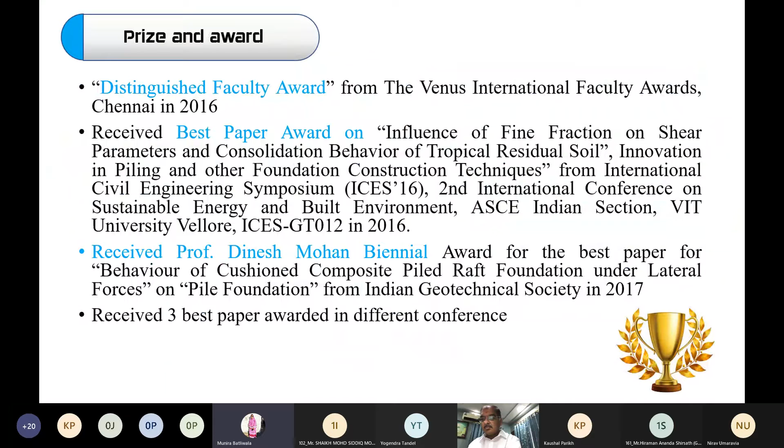Sir has published more than 180 research papers in reputed international and national journals and conferences. Sir has received the Shri M.S. Jain Biennial Award for Best Paper in IGC 2013, Professor Dinesh Mohan Award in IGC 2017, and the Distinguished Faculty Award for the Venus International Faculty Awards 2016. Sir has also received many Best Paper awards in many conferences. Professor Solanki sir has organized more than 20 national level events including STTPs, FDPs, conferences and seminars. He was the chairman of the Indian Geotechnical Conference 2019 Surat. Sir has been elected as member of Executive Committee IGS for 3 terms. Sir worked as the Dean and Head of the Department at SVNIT Surat. Sir has published 9 books and edited proceedings. He has 30 years of teaching experience for undergraduate and postgraduate students.

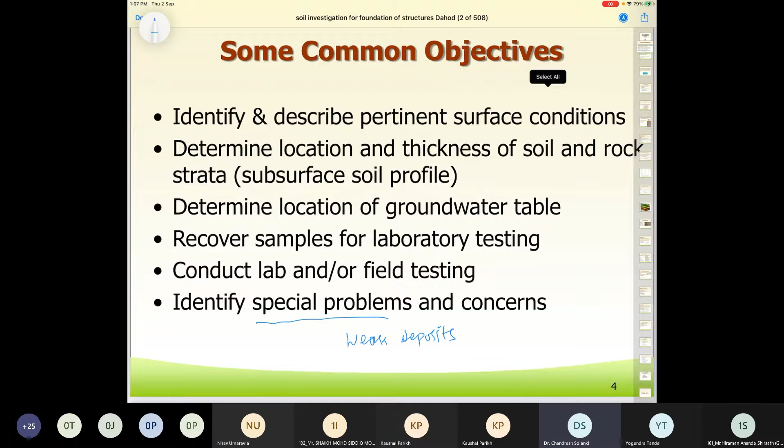Many of you may have come across this point while designing foundations. If you are getting your foundations on weak deposits, you need to apply some ground improvement techniques. I have seen the schedule that some speakers might have discussed ground improvement techniques - what are the different techniques and in which situations these techniques are to be applied.

Geotechnical investigation would consist of what? It consists of the number of test bores, the depth of the test bores, what field tests are to be carried out at the site depending on site situations, the laboratory tests to be conducted, and correlations of the field and laboratory test data for determination of the safe bearing capacity.

Here I would like to ask one of these questions to the participants. Can you elaborate on what are the correlations between field and laboratory test and how geotechnical engineers decide the same? My question to you is how will you correlate the field and laboratory testing as far as soil investigation is concerned.

Please, one of the participants may answer if possible. Participants can write in the chat box, they can interact, otherwise they can mute themselves. Okay, if participants are mute, I may not ask Dr. Yogendra. It's okay. Yes, okay, because I may not be able to see the chat box since I'm working from iPad, so it may be difficult to go back. Okay, no problem.

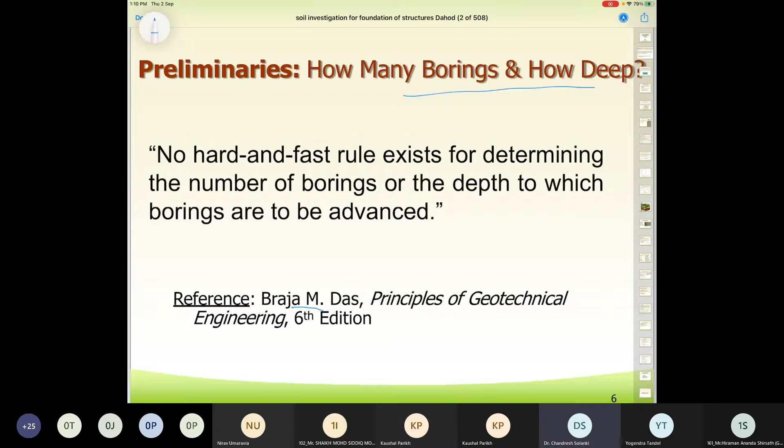However, in the book by Braja M. Das, it has been written that no hard and fast rule exists for determining the number of borings or the depth to which borings are to be advanced. However, we need some guidelines - our IS codes as well as general guidelines - for deciding the number of borings and depth of the borings.

Preliminarily, how will you decide the number of borings? Conventional wisdom says the number of borings will increase if soil variability increases. If load increases for more critical and significant structures, the number of borings is more - so the number of bores will be more in such situations.

The thumb rule says that in case of soft soil, generally the spacing between two bores is kept at 100 to 200 feet, whereas in case of harder strata, it may be kept up to 500 feet. This means your boring spacing is in the range of 30 to 60 meters for soft soil, whereas it may go up to 150 meters for hard or dense strata, or good strata.

How many borings will have to go for and for what type of structures? You may have to deal with various structures, or if you are a faculty member at an institute, you may have some knowledge of geotechnical investigations. Some of you might be teaching these subjects too. In such cases, some guidelines should be with you in terms of the number of borings.

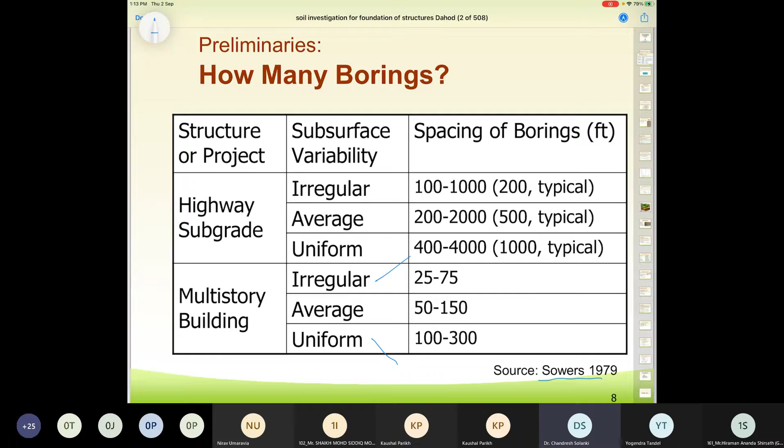This is about test bores. How will you decide the number of test bores and what you'll have to do? As per IS 1892, clause 2.3.1, for a compact building site covering an area of 4000 meters square, one borehole or trial pit in each corner and one in the center should be adequate. For smaller and less important buildings, even one borehole or trial pit in the center will suffice.

You see that this is a square plot area, whereas in this case, this one is the rectangular plot area. In case of the square plot area and rectangular plot area, whenever you have a plan area of around 4000 meters square, if your building is ordinary or very less important, in such cases, one borehole is sufficient.

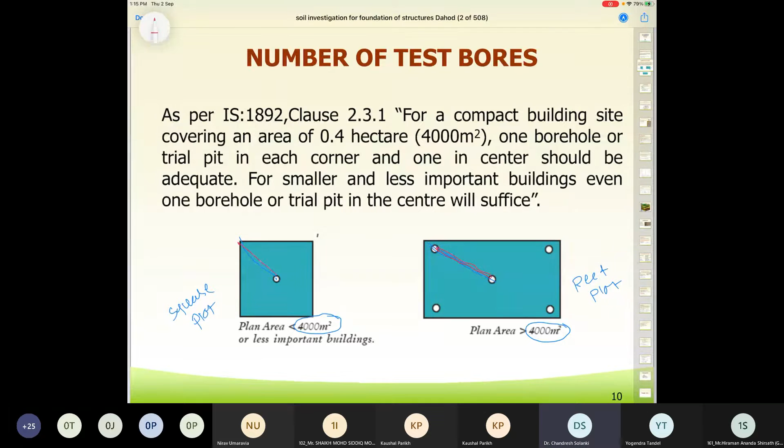But here it has been shown that this is a square plot area. Its corners are closer to the center, hence the number of boreholes required are less. Whereas in case of the rectangular plot area, the corners are away from the center, and hence the number of boreholes required are more. So you can find that this distance is more, you can find here that the distance is more. Hence, we'll have to go for more boring. Whereas this distance takes care of the plot area, and hence fewer boreholes may be sufficient.

However, whenever the soil is heterogeneous, where the soil is not homogeneous, in such cases, instead of one borehole which has to go for the square plot area, you may have to go for 3 boreholes instead of one. This has to be increased to 3 boreholes because the soil is heterogeneous. Whereas in case of the rectangular borings, you may have to go for 5 bores, even if your plot area is around 3000 meters square.

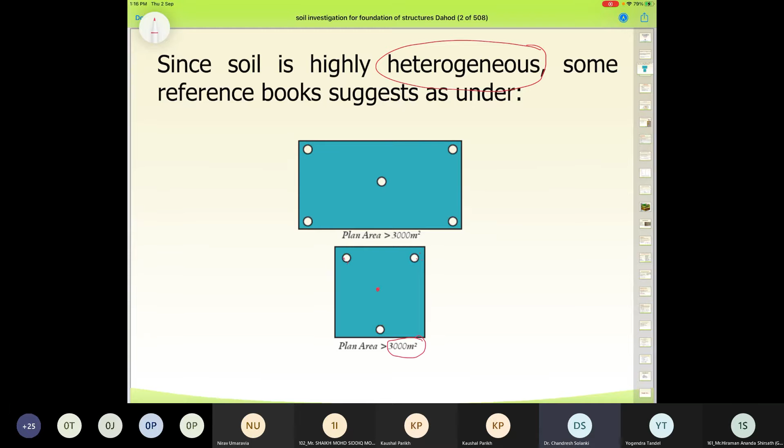However, for ordinary buildings, investigations can be limited to economize in money and time, and 2 test bores may be taken across the site. If highly variable strata are encountered, additional test bores may be taken. So you see that this building is an ordinary one. Investigations can be limited to economize in terms of money and time. In such cases, instead of 5 boreholes, here you have to go for 1 or 2 boreholes. But such risk you may take into the conditions whenever you have such situations.

Now, what to do when the area to be investigated is large and the plant layout is not finalized? The area may be divided into a grid of suitable size and test points taken on grid corners. You see this is the plot area, a larger area, which has been divided into different grids. We are finding out the number of grids.

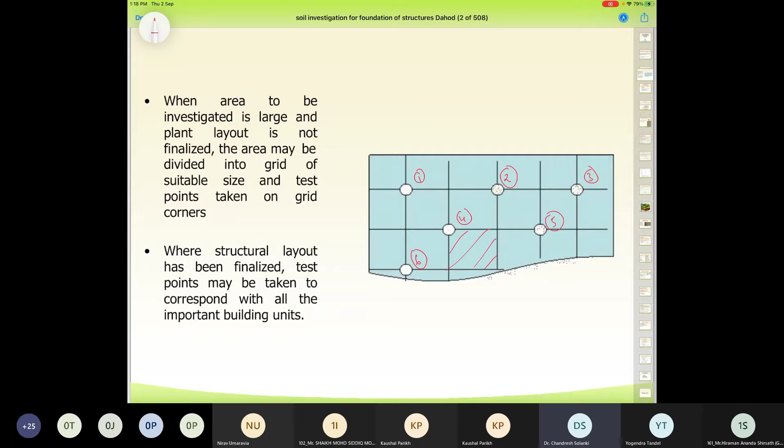The test points are being marked here. In view of the structural layout being finalized, these test points might be marked wherever the column is heavily loaded, wherever the staircase has to come, or wherever heavy machinery has to come. Certain points are marked for the bore logs for this plot area, and you have to decide the number of boreholes accordingly. So this area has to be divided into grids, mark the important points, find its locations, and go for borings at that particular point.

Dr. Yogendra? Yes, sir, may I go ahead? Yeah, okay, everything is fine, in terms of voice, slides, presentations, everything. Can you see the things I write with the pen? Yes, it is visible. Fine, okay.

For various structures, the number of test points may be considered as follows, in respect of the type of structure and number of test bores. Lightweight utility structures like parking sheds and watchman cabins, where structures are not so important, you may go for a minimum of one test bore, or sometimes a trial pit is sufficient. You may not have to go for entire boring; even a trial pit lets you decide the depth of the foundation.

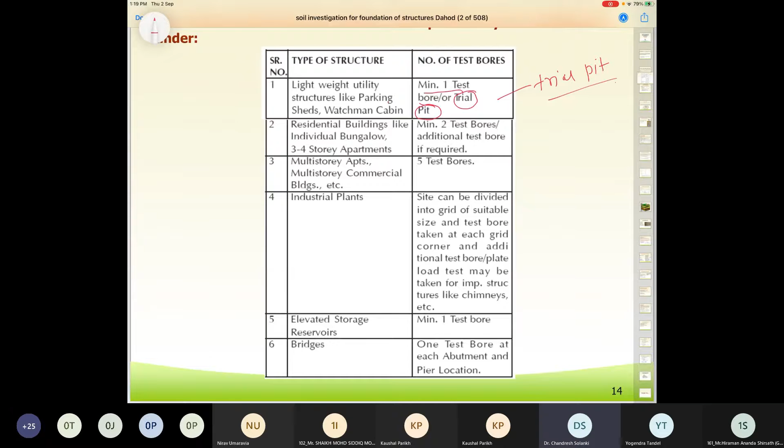Whereas guidelines show that for multi-story apartment or commercial buildings, you must go for at least 5 test bores of appropriate depth, in view of the multi-story structure. In case of bridges, you must go for at least one test bore at each abutment and each pier location. These are some guidelines for different structures and how many test bores you need for a particular site, as mentioned here.

We have discussed how to decide the number of boreholes. Now we come to the depth of the test bore. The depth of the test bore should extend up to a point at which the vertical stress due to the proposed structure is equal to or less than 10% of the original effective stress at that point before the structure is constructed. You might have studied about the pressure bulb and isobars, which are useful in computing foundation settlements.

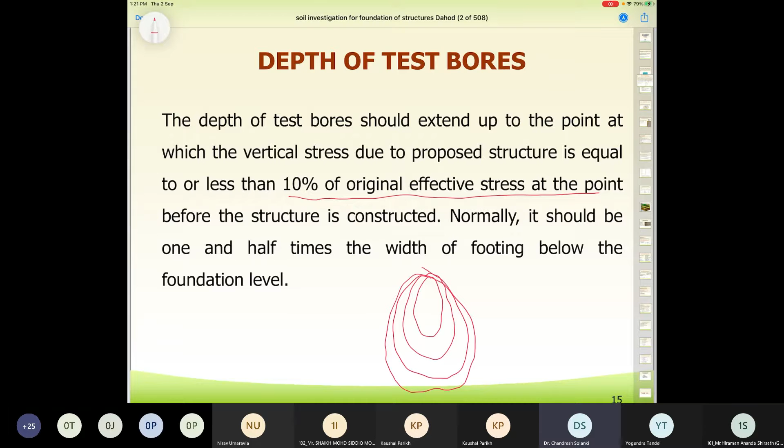Normally it should be 1.5 times the width of the footing. So you are required to go up to 1.5 to 2 times the width of the footing below the depth of the foundation, particularly in favorable conditions. In unfavorable conditions, you may have to go deeper than 1.5 to 2 times the width of the foundation.

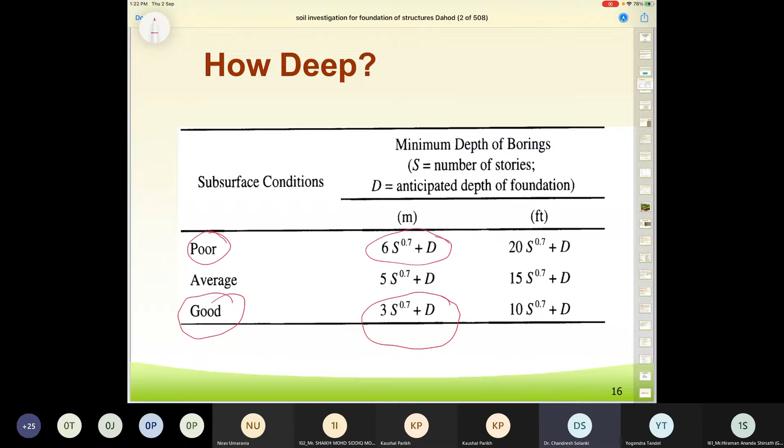Some guidelines are given in the literature on how to decide the depth of borings for different numbers of stories and anticipated depth of foundation. It also depends on the type of soil. For good soil, you may go less deep, meaning the depth of exploration is less; for poor soil, the depth of exploration is more. S indicates the number of stories and D indicates the anticipated depth of foundation. For a 15-story structure with an anticipated foundation depth of 3.5 meters, depending on soil type, you can decide how deep to go for your explorations.

Preliminarily, how deep will you go for bridges? Boring depth is governed by various factors including foundation type, foundation loads, scouring depth, etc. Generally speaking, 50 feet to 80 feet is reasonable. However, practical experience is useful. A geotechnical consultant familiar with a particular site may take some risk and go for lesser depth, whereas one unfamiliar with the site may have to go deeper for the first bore and then adjust.

In addition, you need to see the nearby structures, when they were constructed, and their existing condition. Based on that, you can have some guidelines for deciding the depth of exploration.

Preliminary, we have seen how many borings and how deep you will go for. Final engineering can be no better than the data upon which it is based. It does indicate that you should have your own data, your own geotechnical report, your own soil investigation report.

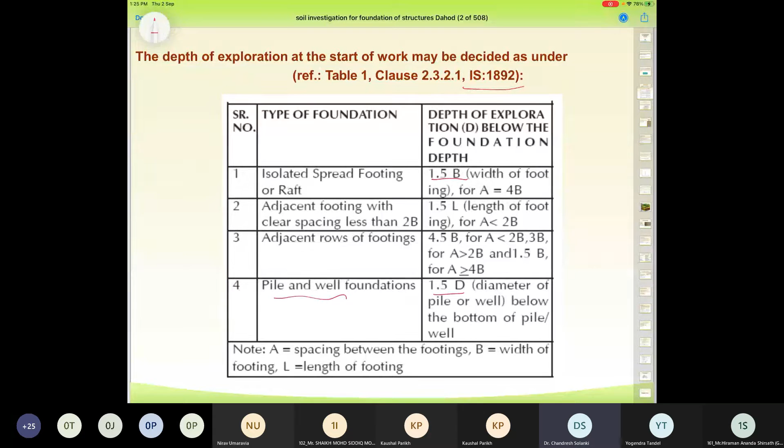How will you decide the depth of exploration? This we have discussed. What is geotechnical investigation? What are its objectives? What is the sequence of geotechnical investigation? How will you decide the depth of exploration? How will you decide the number of borings? Some of these guidelines have been discussed by me here in this lecture.

Now I'm going to the field tests. What are the field tests to be performed in the soil, and what results are obtained from that? And how the results obtained from the field test are to be interpreted for your design, this has to be discussed by me.

Yogendra, is the slide clearly visible to you? Yes sir, it's visible. Okay, fine.

The most widely used method of subsurface investigation is boring holes in the ground and simultaneously conducting the standard penetration test and collecting undisturbed samples. You may already know about the collection of undisturbed samples as well as collection of disturbed samples, and you may have come across the standard penetration test many times. Today I am going to discuss in detail the interpretation of the standard penetration test, and how the field N value obtained has to be interpreted for foundation design.

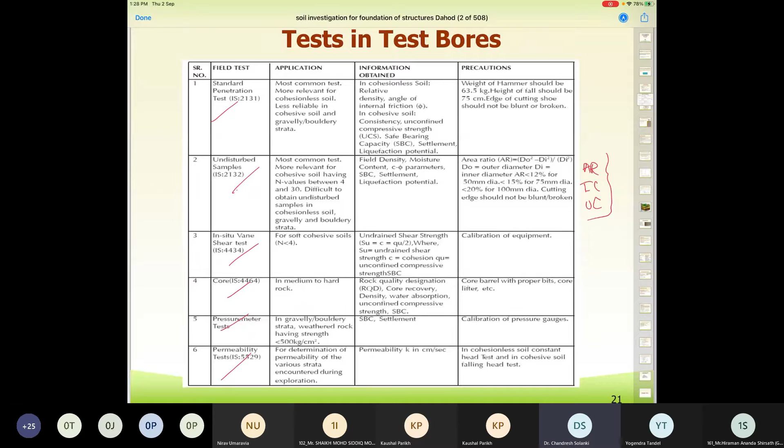Now, what are the tests to be performed in trial pits? You can also collect undisturbed samples from trial pits. You can perform the plate load test on trial pits. Some of you might not be aware of IS 5249. I request you to refer to IS 5249.

I request you to refer IS 5249, which is a code for determining the dynamic properties of soil. This code describes the block vibration test and cyclic plate load test for determining the value of the coefficient of elastic uniform compression, CU, which is useful for machine foundation design. This value can be obtained either by the block vibration test or by performing the cyclic plate load test, as described in IS 5249.

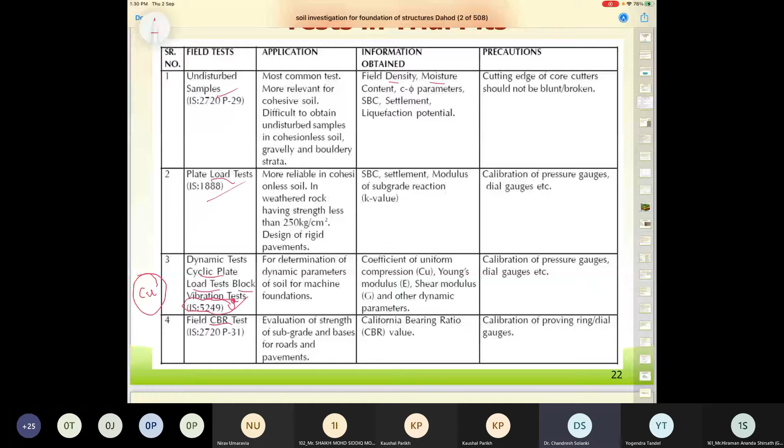You are familiar with the California Bearing Ratio test, plate load test, and undisturbed sampling, etc. The results obtained from these tests are used for design purposes. What information is obtained from a particular test, and which tests can be performed on trial pits, has been mentioned in this slide.

You may be familiar with these three types of tests. You have the Standard Penetration Test, which we are going to discuss in detail in this class. Cone Penetration Test - you have two cone penetration tests: DCPT, which indicates the Dynamic Cone Penetration Test, and SCPT, which indicates the Static Cone Penetration Test. The Static Cone Penetration Test is particularly useful in deep foundations.

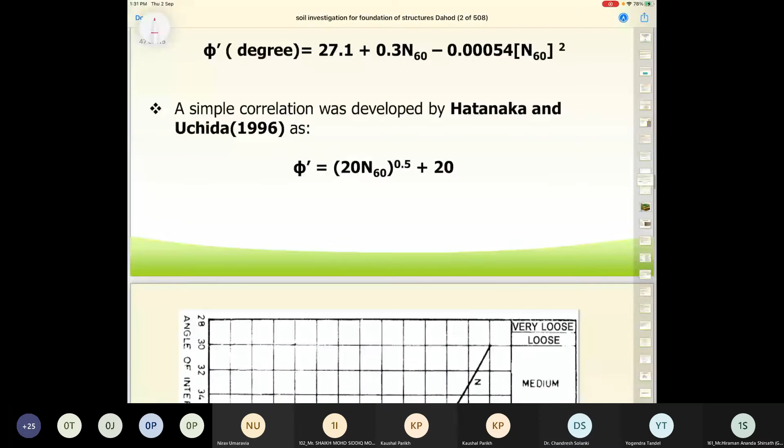Whenever you are going for pile foundations, this test is useful. The Vane Shear test is particularly useful in sensitive soils, marine soil, or soft clay. This test is used for performing at the site to get the soil properties.

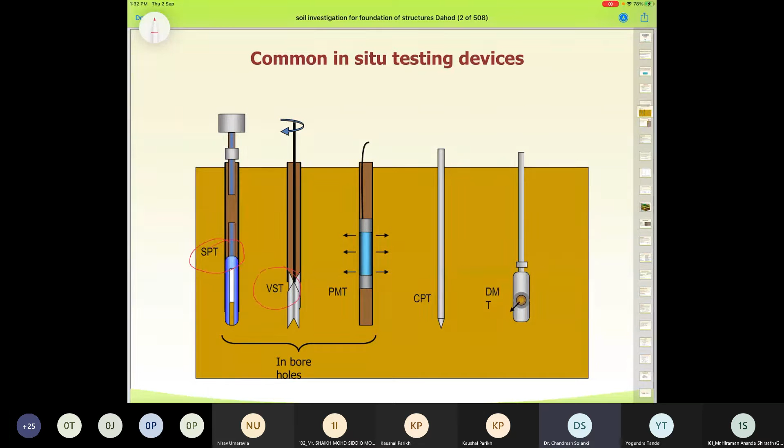Common in situ testing devices: Standard Penetration Test, Vane Shear test, Pressuremeter test, CPT test, and Dilatometer test. These are the tests which can be performed.

Now, what is the Standard Penetration Test and what do we do in that? How can the results of the Standard Penetration Test be interpreted - that we are going to see here. The Standard Penetration Test is an in situ penetrometer test carried out in a borehole, so the test is conducted in the borehole. This test measures the resistance of the soil against penetration. You are driving the sampler into the soil, into the borehole, to measure the number of blows required for the particular thickness of the stratum.

It is commonly used for testing sands and gravels. This test is mostly preferable in non-cohesive soils. However, in case of non-cohesive soil, this is more preferable. Some interpretations have also been obtained by various researchers for cohesive soils with the N value. An empirical correlation is derived between the soil properties and the penetration resistance N value.

This is showing the mind map of the SPT test. This mind map, whatever has been shown here, may be useful to you in many ways. I am going to show one sentence in this presentation: in conventional foundation design, 85 to 90% of the design is based on SPT test data. SPT test gives you the N value, and this N value is correlated with many soil properties.

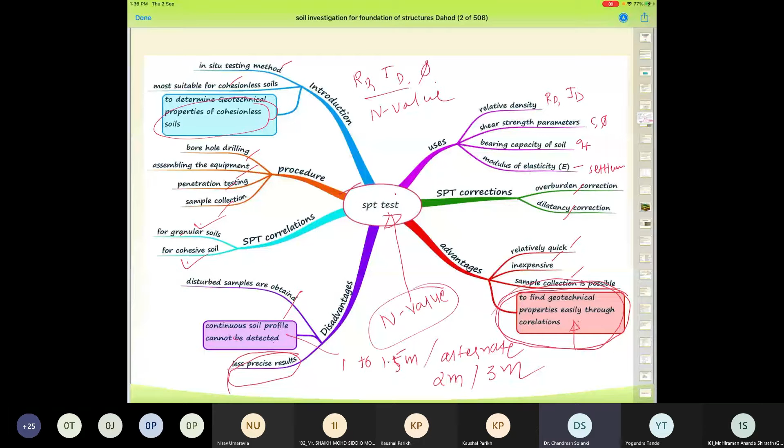So this is the entire thing being shown for the SPT test, and you can understand a lot of things from this mind map which has been shown to you.

Dr. Yogendra or Nirav? Yes, sir. May I go ahead? Yes, okay sir. Will every participant be comfortable with this? Yes, sir, it's comfortable. Just confirming, as this is online I do not have reactions from the participants, that's why I am confirming with you. Thank you, Dr. Yogendra. Doesn't matter, sir.

Standard penetration test is conducted using a 65 kg hammer, sometimes its weight is written as 63.5 kg. Height of the fall is generally considered to be 75 centimeters, and this is the rod through which we apply to drive the sampler.

This is the split spoon sampler in which the soil is collected. We drive it for three slots of 15 centimeters each, but the first slot is considered an initial seating drive, and whatever number of blows required for the next 300 mm, the summation of these two is known as the capital N value or blow count.

This is known as the N value. In standard penetration test, we use a hammer of this weight, with height of fall around 75 centimeters.

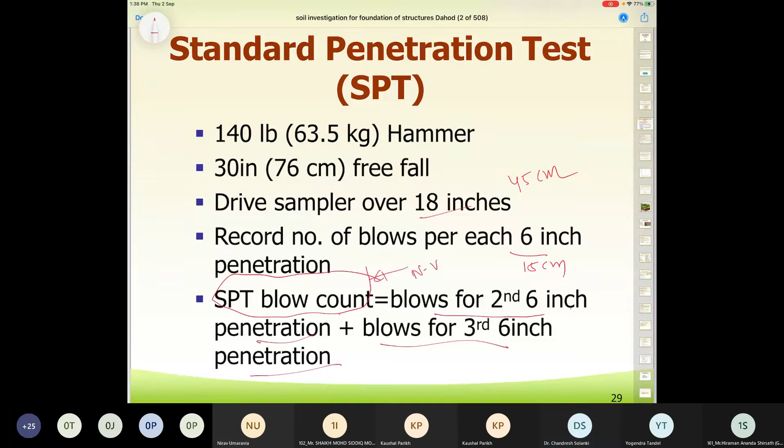Standard penetration test is mainly for granular soils, may not be reliable in clays, but sometimes we have to use the data anyway. N value is correlated with the phi value and E value. Phi value indicates the bearing capacity, and E value indicates settlement studies.

This is done with boreholes at 1.5 meter depth intervals. Samples which we receive may be disturbed samples; the area ratio is too large, hence whatever samples are collected are disturbed samples.

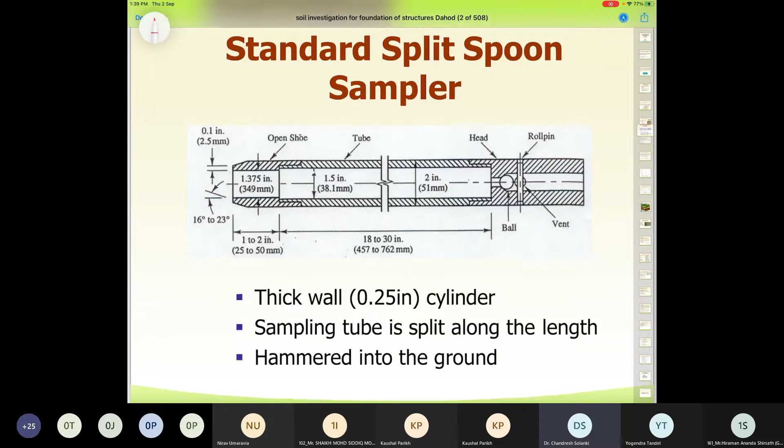Standard split spoon sampler: here you have a thick wall of 0.25 inch cylinder. The sampling tube is split along the length, hammered into the ground, and this is the split spoon sampler in which the soil sample is collected.

The test is conducted in a borehole by means of the standard split spoon sampler. Once drilling is done to the desired depth, the drilling tool is removed and the sampler is placed inside the borehole. By means of a drop hammer of 63.5 kg mass falling through a height of 750 mm at the rate of 30 blows per minute, the sampler is driven into the soil. The number of blows of hammer required to drive a depth of 150 mm is counted. These things have already been discussed in the previous slides.

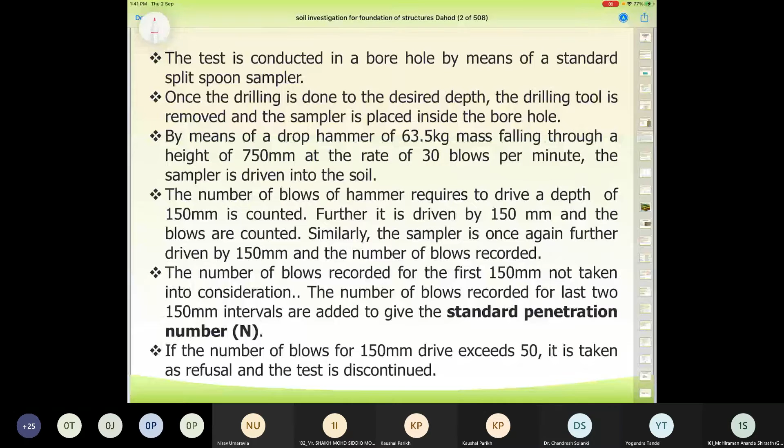In soil investigations, whatever samples are collected for laboratory testing may be disturbed or undisturbed samples. Disturbed samples are used for mechanical analysis such as sieve analysis, hydrometer test, plasticity characteristics such as liquid limit, plastic limit, shrinkage limit, water content determination, specific gravity determination, compaction test, and other index properties. Undisturbed samples are mainly used for strength parameters and compressibility parameters.

It should be noted that the standard penetration test is currently the most popular and economical means to obtain subsurface information, both on land and offshore. It is estimated that 85 to 90% of conventional foundation design is based on the standard penetration test, that is the N value.

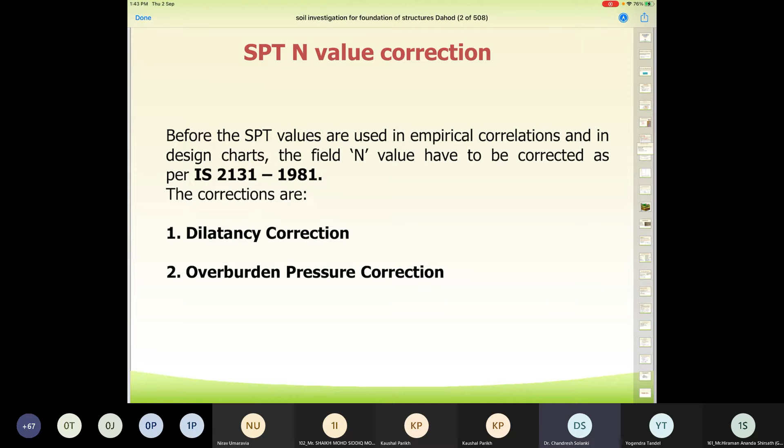SPT N value corrections: before the SPT values are used in empirical correlations and design charts, the field N value has to be corrected as per IS 2131-1981.

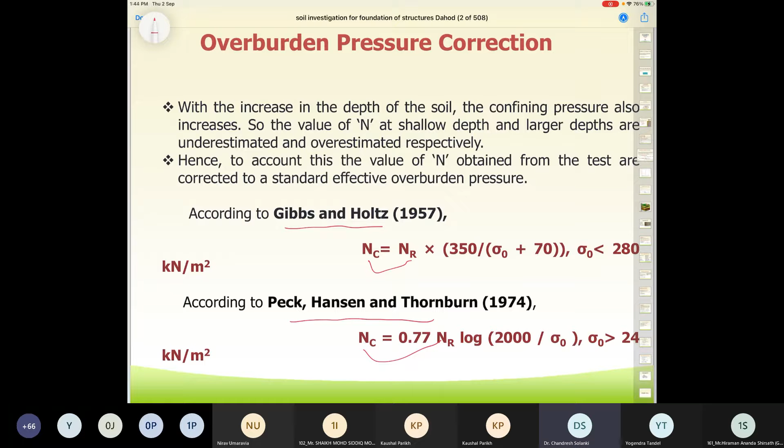In case of overburden corrections, you may apply either the Gibbs and Holtz formula or Peck, Hansen and Thornburn's formula to get the N corrected value based on the recorded N values. This depends on the overburden pressure sigma naught, whatever its value is, and based on that it can be decided.

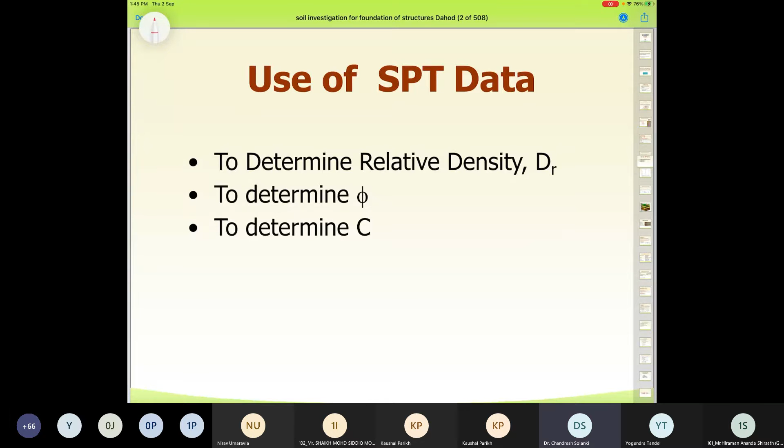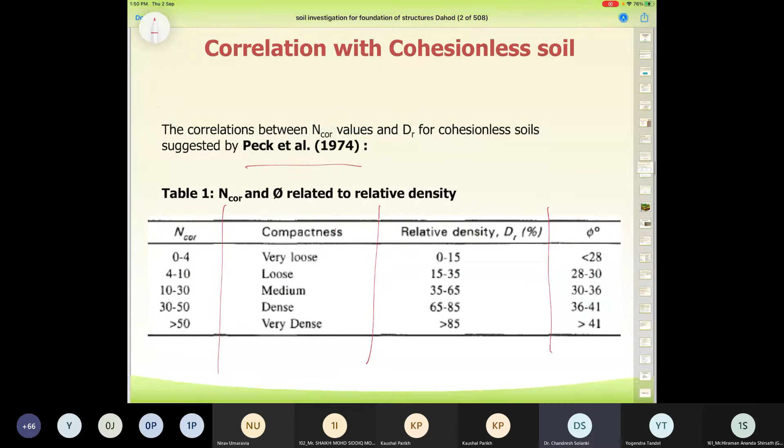So you do have the correlations with the cohesionless soils. The correlations between the corrected N values and DR for cohesionless soils are suggested as under. The similar thing has been shown to you, whatever had been shown in the last case, with some difference. The phi value, relative density, and compactness of the soil with N corrected has been mentioned based on Peck et al. in 1974.

You may be aware of the settlement of the foundations. The immediate settlement of the foundation Si is given by Q B (1 minus mu square) upon Es. So the elastic modulus of the soil is important in case of the calculation of the immediate settlement of the foundations.

So for the different soils such as clay, sand, and gravel, and in that also for sub-classification, what may be the approximate value of the Young's modulus you can choose has been mentioned here in this slide. In addition to this, the Poisson's ratio values are also given for the different soils, and depending on the soil types, you can find out preliminary the immediate settlement of the foundations.

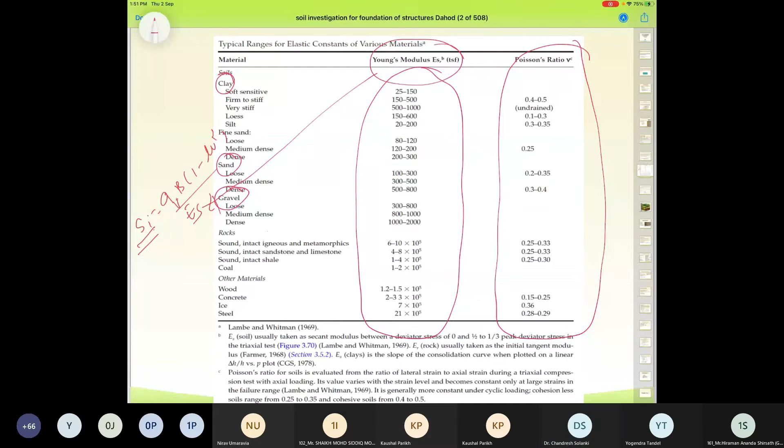Common properties of the cohesionless soil has been mentioned here. It is depending on the type of the soils. Can we take a 2 minute break for drinking water?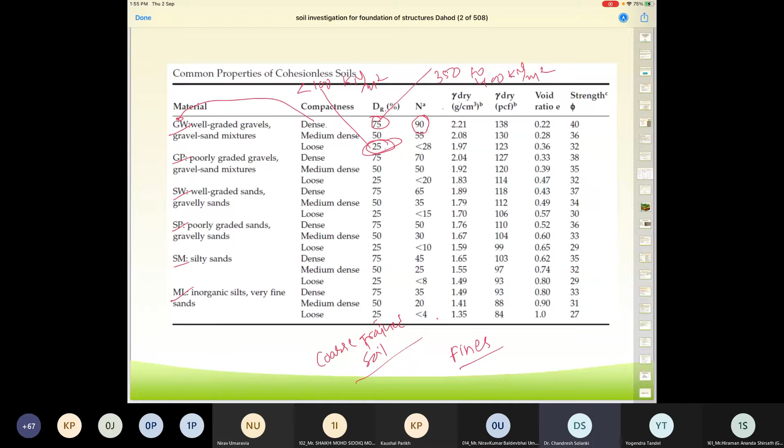Similarly, what is the dry unit weight for the particular soil in gram per cc? It has been mentioned. You might have found that this one is the highest dry density which can be obtained in case of the well-graded gravels, whereas the void ratio is less. Here in this situation, the void ratio is more. And strength in terms of the phi value, if phi is equal to 40 degrees, this may have more than 400 kilonewton per meter square too.

This indicates that the common properties of the cohesionless soil in respect of the N value has been mentioned here in this chart.

Meyerhof has suggested the N60 value, that is for the 60% efficiency, depending on the overburden pressure and relative density. How you can find out the N60? Depending on the N60, you can find out the phi value. Also you do have another relation for N60, that is phi dash.

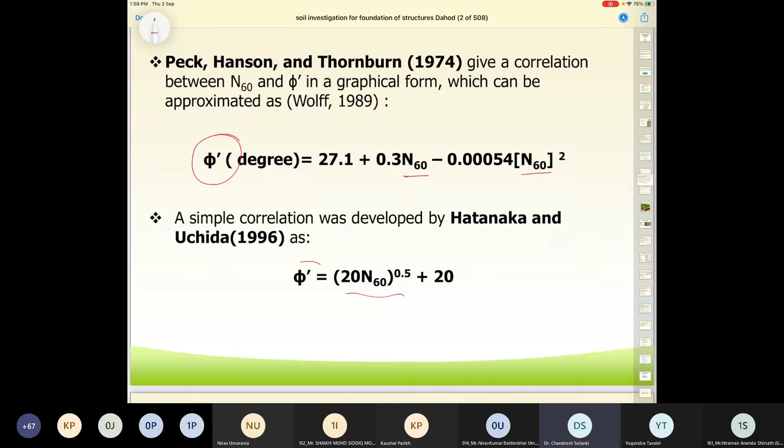This is the relationship between phi and N value. You can observe here, earlier we have seen that the angle of internal friction is 40 and its phi value, the standard penetration resistance is coming out to be nearly 50. This comes under the category of dense to very dense sand. And if you do have this range of the angle of internal friction, it comes under loose or very loose sand. So this is the relation between phi and N value, which has been given in IS 6403.

The ultimate net bearing capacity shall be calculated. You are familiar with Terzaghi's bearing capacity equation: C Nc plus gamma D Nq plus 0.5 gamma B N gamma. These are extensions of that, considering the shape factor, depth factor, inclination of load factor, etc.

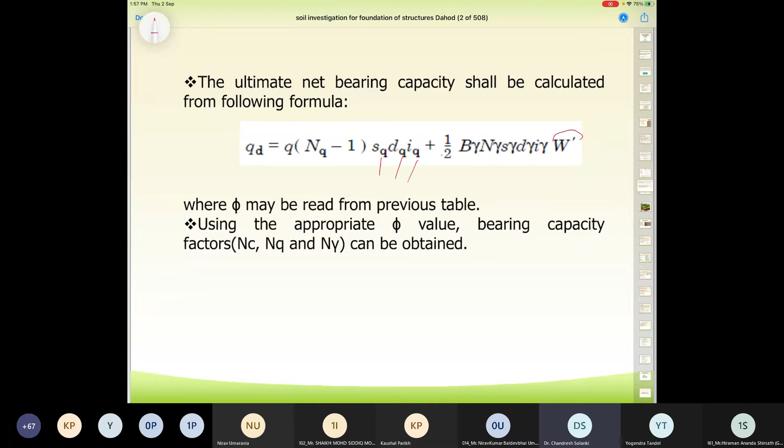W dash is the position of the water table, and its effect has been considered in the bearing capacity calculation. As discussed, this test is mainly useful for cohesionless soils. However, its use is also there for determining the unconfined compressive strength, Qu.

Unconfined compressive strength is particularly performed in case of pure clay. You are familiar with the Mohr-Coulomb law: Tau is equal to C plus sigma minus U tan phi. And you are also familiar with sigma 1 is equal to sigma 3 Nphi plus 2C root Nphi.

Where Nphi is equal to tan square of 45 plus phi by 2. This part is known to you. In case of the unconfined strength, whatever sigma 3 we are applying, it is 0, which is not confined. And we do have sigma 1 is equal to 2C root Nphi.

Phi, here in our case, is 0 for pure clay. So this value has to be 1, since tan square 45 is 1. So sigma 1 is equal to 2C, and by that way, Qu is equal to 2C. So cohesion can be obtained by Qu by 2.

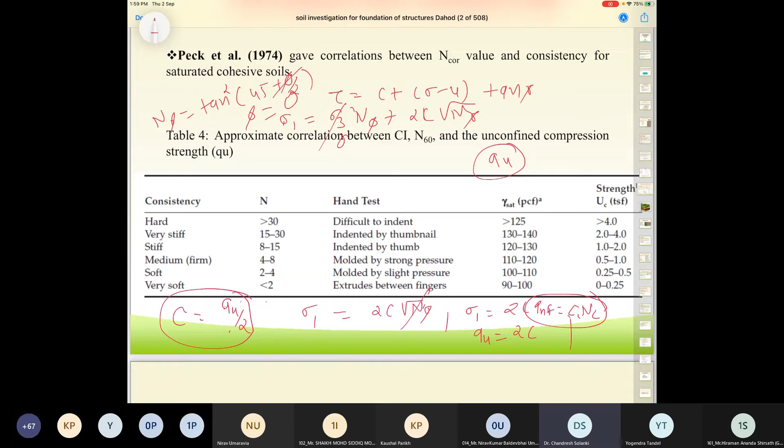So once you obtain the cohesion, you can apply Skempton's equation of bearing capacity in general, C Nc Q Nq F, where you can add the shape factors 1 plus 0.2 B by L, 1 plus 0.2 D by B. And likewise, you can use Skempton's equations, put the value of C, and find out the bearing capacity of the foundations.

Here you do have the N60 values. You do have the undrained cohesion C. What will be the consistency of the soil? And while going for visual identification or obtaining the sample at the site, how you will check the same soil has been mentioned here.

So for different values of this, 0 to 2, the Cu value is this, and likewise it has been mentioned. Whenever you have very stiff soil, your consistency index of the soil, IC, is 1 or more than that. You can check it. IC is determined by WL minus W upon IP. You can determine accordingly.

Now, the next slide shows how you are correlating the Cu value with the N value. It has been mentioned how Cu value with OCR with N value has been correlated.

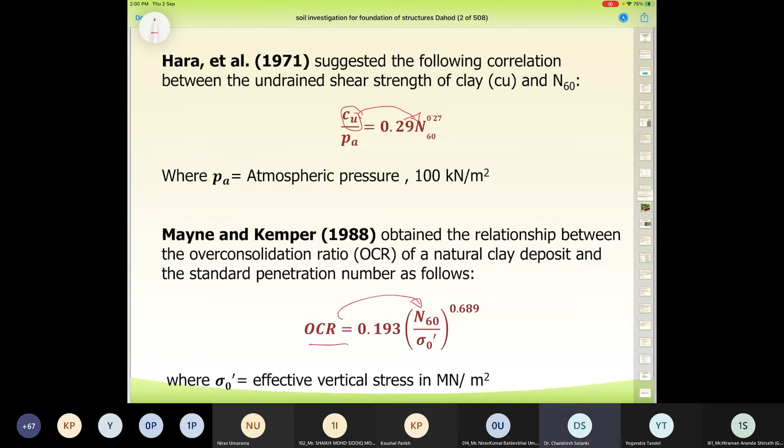Correlations of SPT with CPT. We'll have to discuss something on the cone penetration test. Cone penetration test is particularly useful in case of deep foundations. We are measuring the frictional resistance and end bearing using this test.

So how do you correlate the value of the CPT test, where you obtain QC, the cone resistance, with the N value? It has been mentioned here: it is 0.4 times in MPa, and the QC value is correlated. And that's why this soil can be correlated with the N corrected value, as also mentioned.

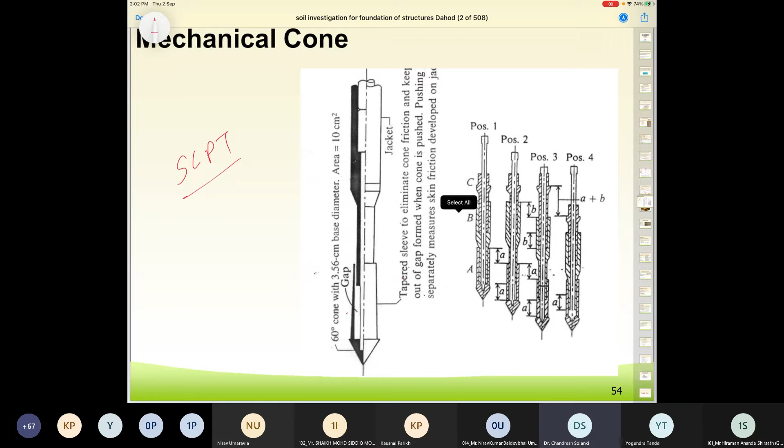In case of the static cone penetration test, we are using the mechanical cone or other cones. This is the cone arrangement: a tapered sleeve to eliminate the cone friction and keep out the gap formed when the cone is pushed, separately measuring the skin resistance developed. Mainly we measure the skin resistance and end bearing using the same. This is the field arrangement; you can apply truck-mounted equipment or so.

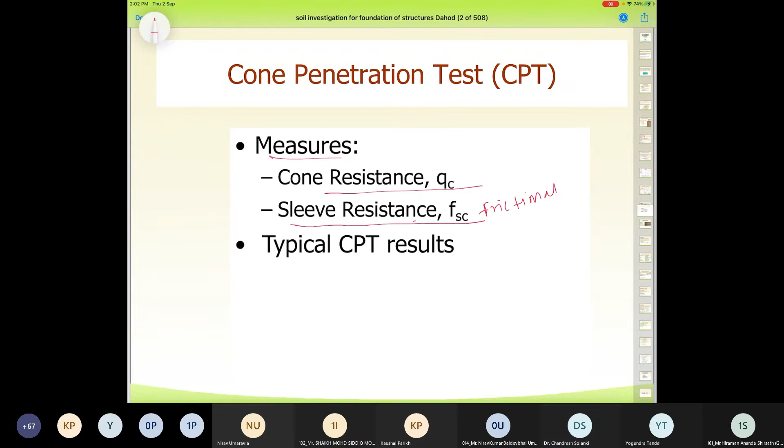Typical CPT data has been shown here. While going for measuring side friction and penetration resistance, you are getting this. However, the drawback of this test is that even though you have these values, you should have borelog presentations. If you have the borelog, you can come to know about the type of soil and interpret the results.

Vane shear test is specially suited for soft and sensitive clays. It is a quick test used to determine the undrained shear strength. Sensitive clays are those clays where whenever you are measuring...

The soil strength in case of undisturbed samples and remolded samples, whatever ratio you are getting, based on that you are going to get your sensitivity. If sensitivity, or this ratio, is more than 4, the soil is known as sensitive soil.

This is a very quick test used to determine the undrained shear strength. When the shear test is to be performed in a borehole, drill a test hole, insert the vane in it, rotate the head, measure the torque at which the soil fails, and relate the resistance to the shear strength. This is one method to find out shear strength of soil in case of sensitive soil, soft clays, or marine soils.

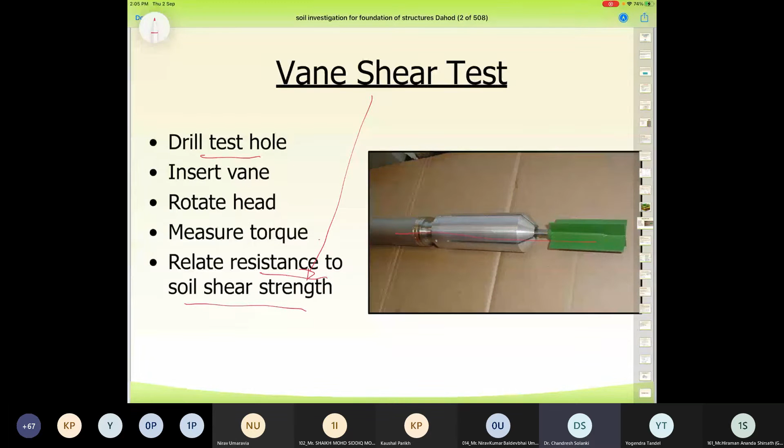Groundwater monitoring is a must in computing the bearing capacity. Groundwater level must be determined during geotechnical exploration or soil investigation. Measure at the time of drilling, and later after 24 hours, 1 week, etc. This can be accomplished by leaving selected soil borings open or installing piezometers. So the groundwater table position has to be determined based on the ground level.

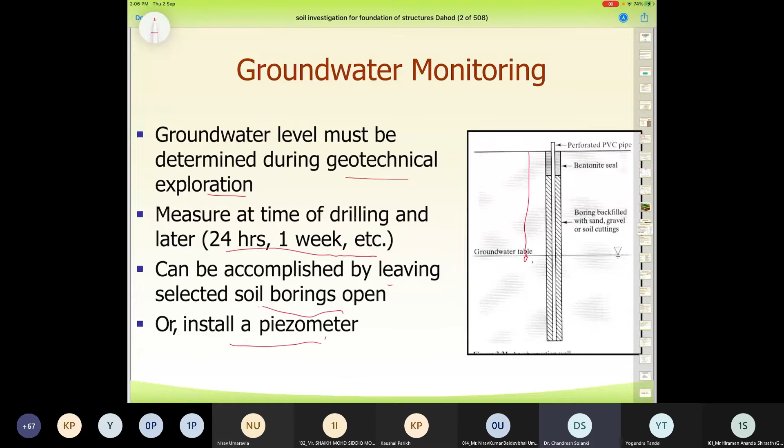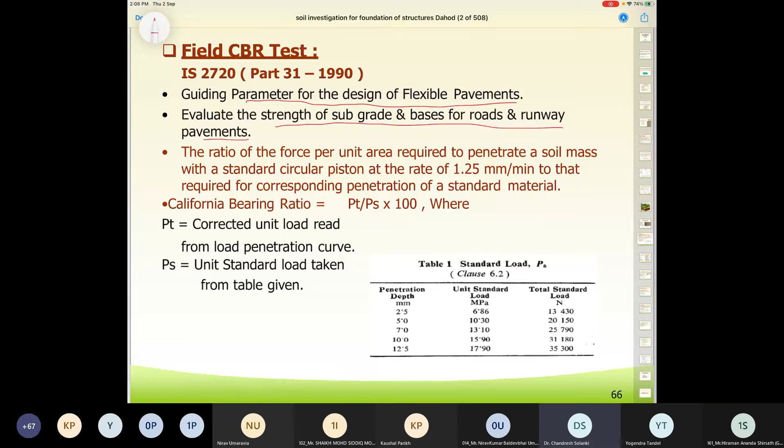Field CBR is very important in case of pavement design, particularly flexible pavement design. The CBR value, which can be conducted in the field or laboratory, is needed. California Bearing Ratio is to be determined, and based on that, the strength of the subgrade is evaluated and bases for roads and runway pavements. This is a guiding parameter for design of flexible pavements too. Many of you might already know the procedure and significance of the CBR test. This is the performance of the CBR test at the site.

As we are talking on soil investigations, you may have some knowledge of the plate load test. The plate load test has to be conducted as per IS 1888, used for determination of the ultimate bearing capacity of soil in place, assuming the soil strata is reasonably uniform. The method is applicable when the soil strata is reasonably uniform and is also used to find out the modulus of subgrade reaction.

Limitations of the test are that results reflect only the character of soil located within a depth less than twice the width of the bearing plate. Since foundations are generally larger than test plates, the settlement and shear resistance will depend on the properties of a much thicker stratum. So you need to compare the size of the plate as well as the size of the foundation.

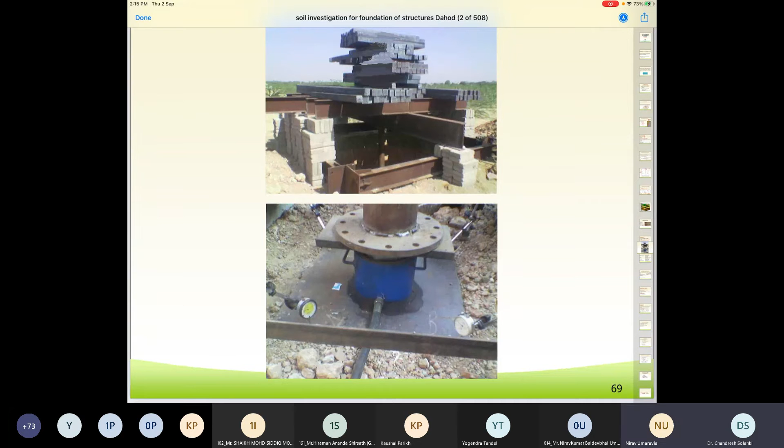Okay, can you see my slide? Yes sir, may I check if I'm audible to you also? Yes sir. Okay, sorry, I had to receive one important call, so I had to take a 2 minute break.

Is it okay now? Yes sir. Okay, so the plate load test is particularly suitable in case of uniform soils. This is the performance of the plate load test, how it has to be carried out at the site.

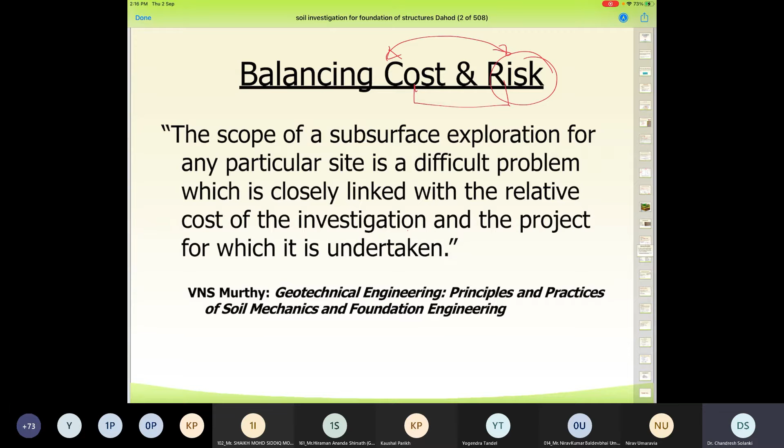Whenever you are going for geotechnical investigations at the site, you need to balance cost and risk. The scope of subsurface exploration for any particular site is a difficult problem closely linked with the relative cost of the investigation and the project for which it is undertaken. So you need to look into the type of project, the budget, and balance both cost and risk. For very important projects, you cannot take any risk. For ordinary projects, you can take some risk and minimize the cost.

You may be aware of this test. Whatever test we are doing in the laboratory and whatever soil mechanics you have studied, you know that in the first chapter you studied the weight volume relationships, in which you studied moisture content and density. Density may have been studied in different forms, such as bulk density, dry density, saturated density, submerged density, etc., porosity, void ratio, and specific gravity.

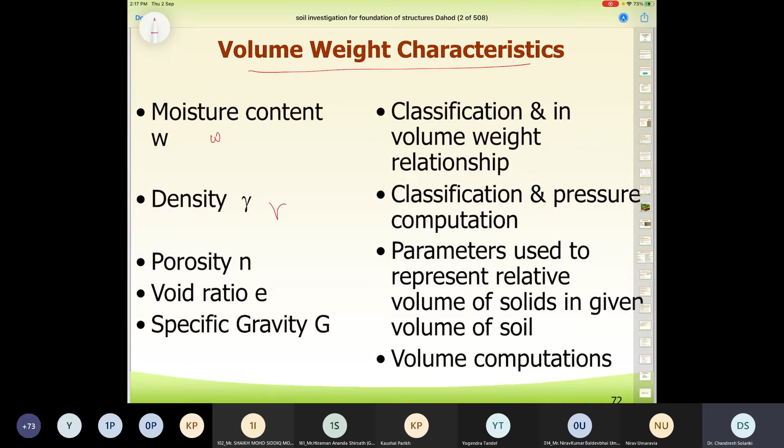Classification and volume relationships, classification and pressure computation, parameters used to represent the relative volume of solids in a given volume of soil mass, and volume computations.

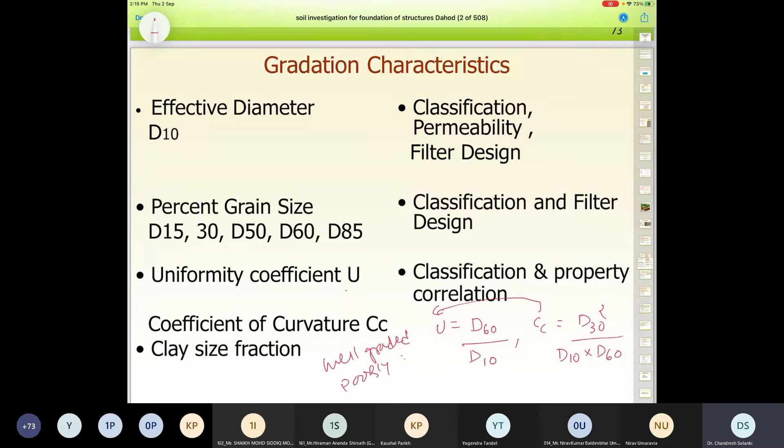Gradation characteristics are the effective diameter D10, classification, permeability, filter design, percentage grain size D15, 30, D50, 60, 85, classification and filter design. Uniformity coefficient, you are aware of this, D60 upon D10, found out from the particle size distribution curve. Coefficient of curvature CC is equivalent to D30 square upon D10 into D60. Based on this, you classify whether soil is well graded or poorly graded, using the results of U and CC.

Consolidation characteristics are important in determination of the magnitude of settlement and time rate settlement. Magnitude of settlement can be determined using the compression index CC or coefficient of volume change. Using the combination of CC and CR, we find out the magnitude of settlement. Whereas for determination of the time rate settlement, we are required to find out the coefficient of consolidation CV. How long will it take to settle? It has to be determined from the value of the coefficient of consolidation.

MV value is particularly useful for over-consolidated soil, and these values are particularly useful for normally consolidated soil. CV value is for the time rate settlement. You know about the square root time fitting method or log time fitting method, from which the CV value is obtained, and hence the time rate settlement or time required for the foundation settlement is found out.

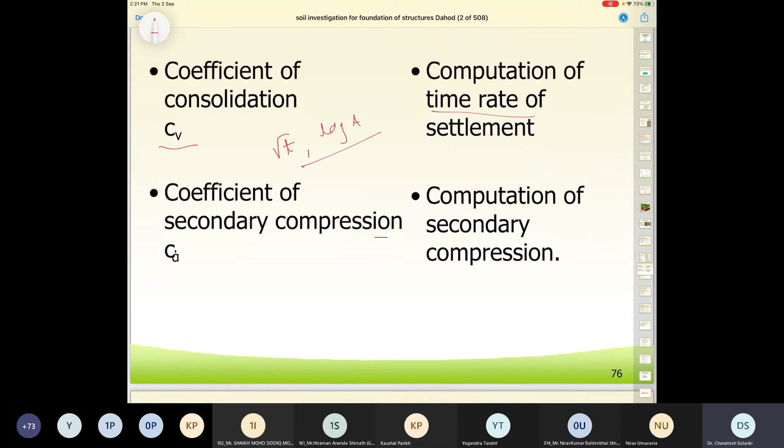Here you do have the square root time fitting method and the log time fitting method.

Strength characteristics are very important in determining the shear parameters. You are having good knowledge of cohesion and angle of internal friction, and the tests to be carried out for the same, including unconfined compressive strength as discussed just now. These results are particularly useful in the analysis of stability of slopes, earth pressures, and load carrying capacity based on strength. These are the major areas where strength characteristics are used in foundation design.

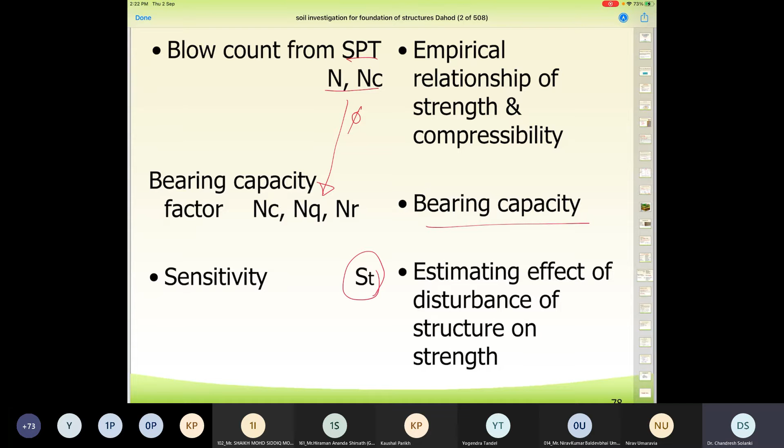The blow count SPT number, we have already discussed in detail its correlations or empirical relations for different properties. This N value and phi value are useful in determining NC, NQ, N phi, and N gamma, and hence determining the bearing capacity. Sensitivity can be determined by the strength in the undisturbed condition divided by the strength in the remolded condition.

Characteristics of the compacted soil are needed in case of earthwork. Wherever you are required to find out the optimum moisture content and maximum dry density, you need to find out the relative compaction, and check your relative compaction at the site based on the values obtained from the laboratory. These values are very important in case of earthwork.

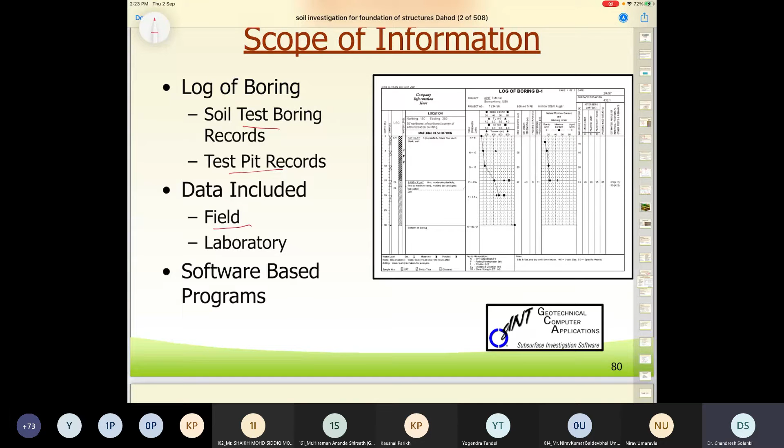Scope for the information includes the log of boring, soil test boring records, and test pit records you are keeping. Data included in the borings are the field data as well as the laboratory data. Your sounding tests are there, including the dynamic cone penetration test, static cone penetration test, electrical resistivity, etc.

Some of the laboratory tests, which you are very familiar with, include field dry density, field moisture content, and particle size distribution. Consistency limits are where you determine the liquid limit and plastic limit of the soil, and find out the various soil indices, including the shrinkage limit. You are classifying the soil on the basis of the A-line chart.

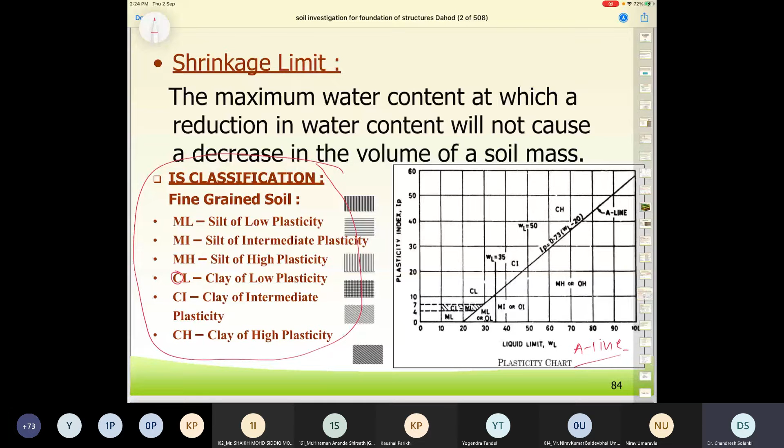This is known as the A-line chart, or Casagrande's A-line, for classification of fine grain soil. These fine grain soils are divided into three types based on compressibility: low, high, and medium. If it indicates C, that is the cohesive soil. If it indicates M, then it is the silty soil. Specific gravity has to be determined in the laboratory, along with the c-phi parameters.

The triaxial compression test results can be used here. Sigma 1 is equal to sigma 3 N-phi plus 2c root N-phi. You can apply this for a number of samples tested, and hence get the C and phi values.

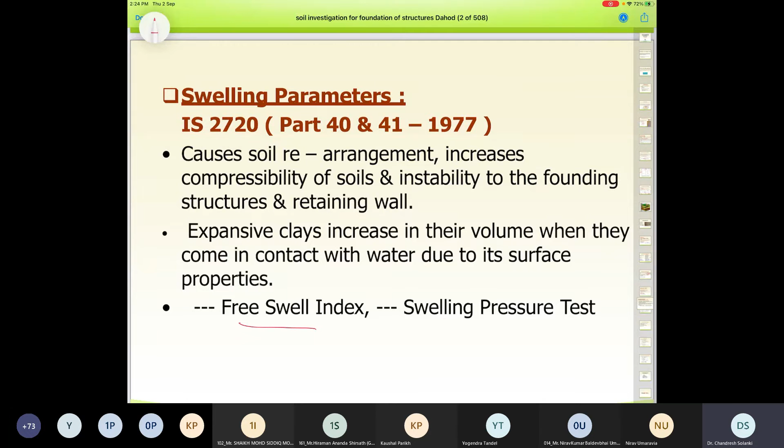Swelling parameters are based on the plasticity characteristics of the soil. In addition to this, the free swell index and swelling pressure test have to be known to us.

Now, in determining the SBC based on shear criteria, you have two options: general shear failure and local shear failure. You should be familiar with these two types of failure, in which soil they occur, and how the data is to be interpreted for finding out the bearing capacity. In case of general shear failure, we use the full parameters of C and phi, whereas in local shear failure, we use the dash parameters for C and phi for finding out the bearing capacity.

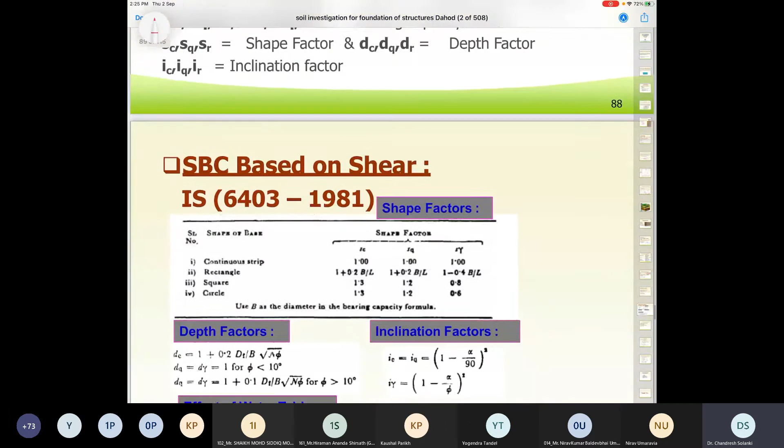As per IS code IS 6403, you have these bearing capacity equations, which consider the shape factor, depth factor, and inclination of load factor. You also have the water table correction factors.

As shown earlier, you have the water table correction factors too. Here you are going to find the depth factors and shape factors on the basis of the values of B and L, and the type and shape of the base, such as continuous strip footing, rectangular footing, or circular footing.

How will you consider the shape factor? It has been shown here. As far as the depth factors are concerned, Dc is equal to these values, and the inclination factor, alpha, is the inclination of the load with the vertical. The effect of the water table is calculated based on its position below the base of the footing, as well as below 1.5 times the width of the footing. These values are computed accordingly.

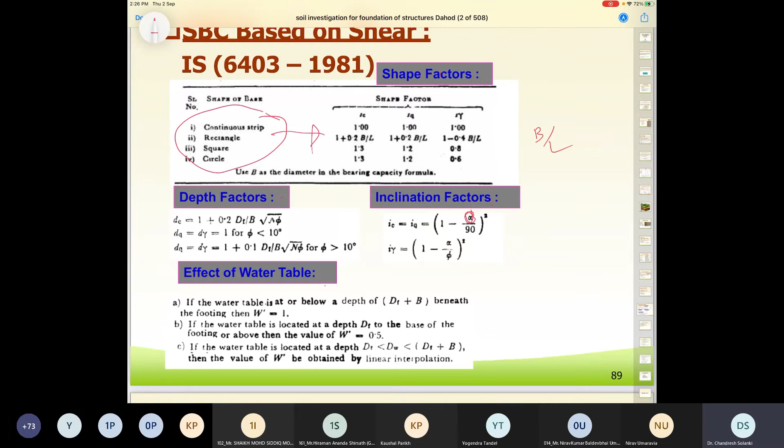The first part of the borelog indicates the field data. Field data includes the depth up to which exploration has been done, visual inspection of the soil, and soil type based on classification obtained from grain size analysis and plasticity characteristics. It also includes groundwater table position, thickness of the stratum, and from which depth which samples have been collected, including disturbed samples, undisturbed samples, and standard penetration test numbers.

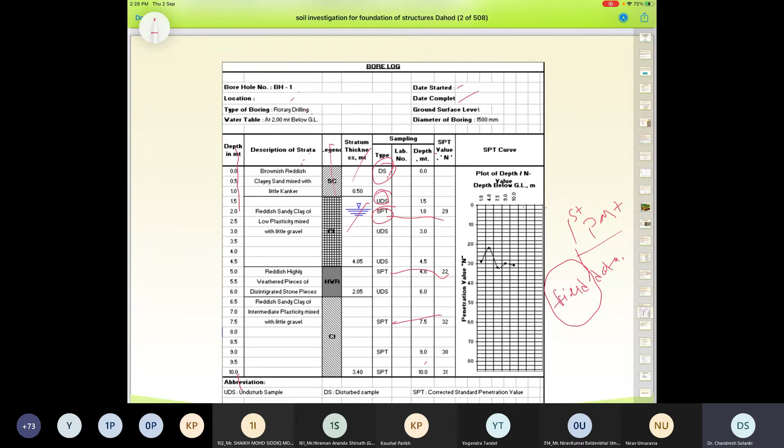You need to write the number of borings, locations, type of boring, water table, date started, date completed, ground surface level, and diameter of borings, etc. This is the second part of the borehole log, mainly consisting of the laboratory results.

In this part, you do have the grain size distribution, the Atterberg limits, IS classifications, shear parameters, consolidation characteristics in case of saturated clay soil, the expansive soil parameters, and the OMC, MDD, and depth in meters. So at which depth, what are the laboratory parameters, it has been mentioned here.

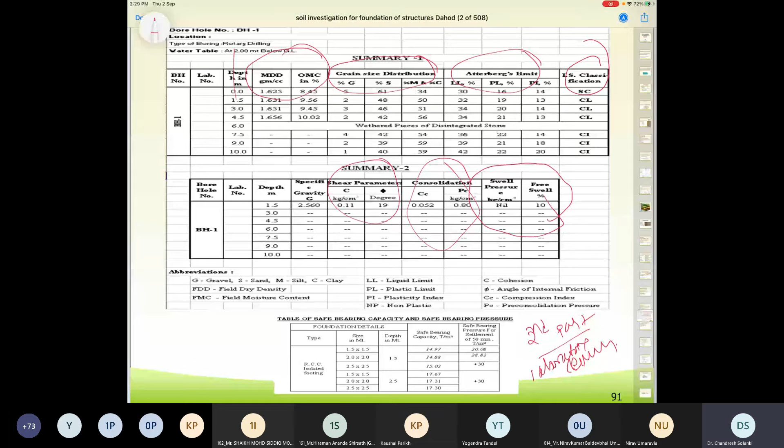Based on the results obtained from laboratory and field data which has been correlated, the value of the RCC isolated footing for different sizes and depth in meters at a particular depth, the safe bearing capacity is being computed. I'm also going to show you how to compute the allowable bearing pressure and the difference between the safe bearing capacity and allowable bearing pressure.

Safe bearing capacity computation, you may be knowing, many of you are familiar with that. You might have done a lot of work in that, or you might have taught it to your students too. The conclusion of this is that...

Information regarding the type of structure and total loads coming on the foundation should be given to the agency carrying out the geotechnical investigation so that the depth of exploration may be modified during the course of investigations, if sufficient bearing capacity is not available at the required or estimated depth. The number of test bores should be adequate to get a horizontal distance as well as the vertical profile of the subsoil strata.

For each strata encountered, the following data should be available: N value, bulk density, natural water content, shear parameters, consolidation parameters, swelling parameters, and classification of soil. Undisturbed samples and SPT should be staggered in test bores. If SPT is conducted at 1 meter depth in test bore BH1, then undisturbed samples shall be collected at a 1 meter depth in test bore BH2, and so forth.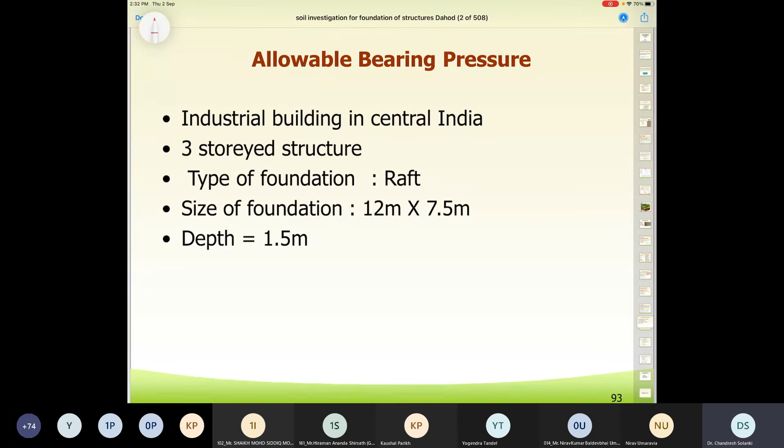So for an industrial building in central India, a 3-story structure, the type of foundation is raft, the size of the foundation is 12 meter by 7.5 meter, and the depth of the foundation is 1.5 meter.

Soil investigation bore log is given in the data, where soil types have been mentioned: CL, ML-CL, SM, CL, and SM. This is low plastic clay and silt, silty sand, low plastic clay, and silty sand.

Here is the position of the groundwater table which has been given. Shear parameters are given in terms of C and phi at different depths.

The influence zone, as I talked to you, is 1.5 times the width of the foundation. Here the width of the foundation is 7.5 meter, hence the influence zone is 11.25 meter. In this zone, this is a silty sand.

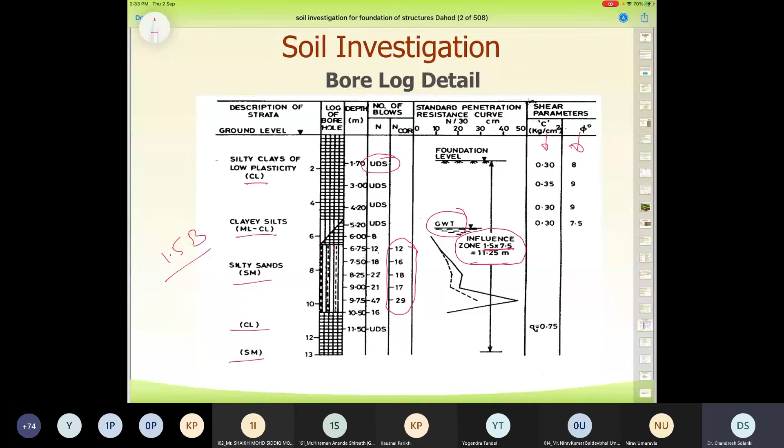The SPT tests are being conducted, and these are the values of SPT at different depths, you can find it. The undisturbed samples have been collected here as this is clay soil, so undisturbed sampling is possible, and hence this is the bore log detail which has been given to us.

In addition to this, some other details are also given. Influence zone below the foundation level is 7.5 into 1.5, which has been shown to you, it is 11.25 meter. Groundwater table is 5.5 meter below the ground level, which is also shown to you.

Whenever you refer to the strata in terms of CL, ML-CL, etc., this is the thickness of the stratum which has been listed here in this slide.

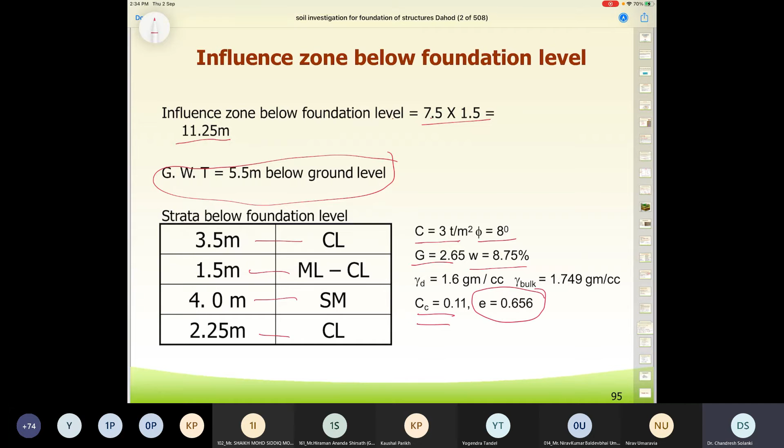The cohesion is 3 ton per meter square and phi is 8 degree. Specific gravity is 2.65 and water content is 8.75. The compression index is also given in the data, that is 0.11, and the void ratio value is computed as 0.656.

Bearing capacity factors are to be computed from the phi values. The values of NC, NQ, and N gamma are obtained. In case of obtaining the dash parameters, you have to reduce the parameters accordingly by taking phi dash equal to tan inverse of 0.67 tan phi.

Method of analysis based on the relative density applies to our case. Here, the void ratio is in the range of 0.55 to 0.75, as our void ratio is found out as 0.656. So we are required to do interpolation of the results obtained in computing the parameters such as NC, NQ, and N gamma.

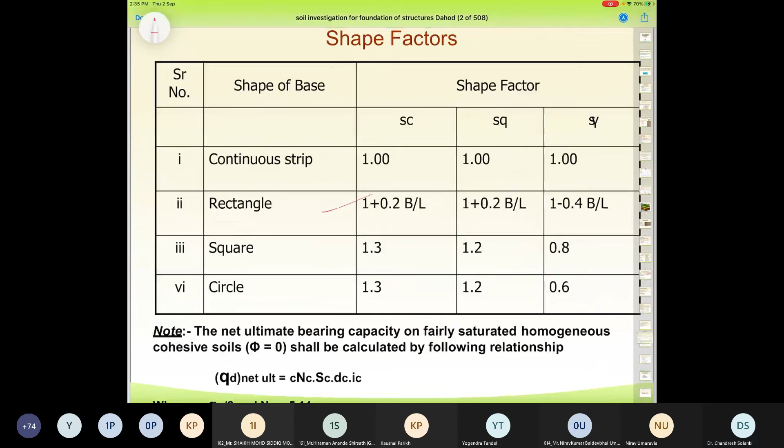First, the shape factors have been taken using the table shown in the IS code, depending on the type of foundation. Our case is of rectangular foundations. Depth factors have been computed using the D and B values, and you have to check the range of the phi value. Our case is not of inclination of loading, hence alpha is equal to 0. That's why in our case, IC is equal to IQ is equal to I gamma is equal to 1.

Now, bearing capacity factors have been computed here. If our case would have been pure general shear failure, you could have taken this value. If our case would have been pure local shear failure, you could have taken these values. However, our case is neither general shear failure nor local shear failure, which is why these results are being interpolated.

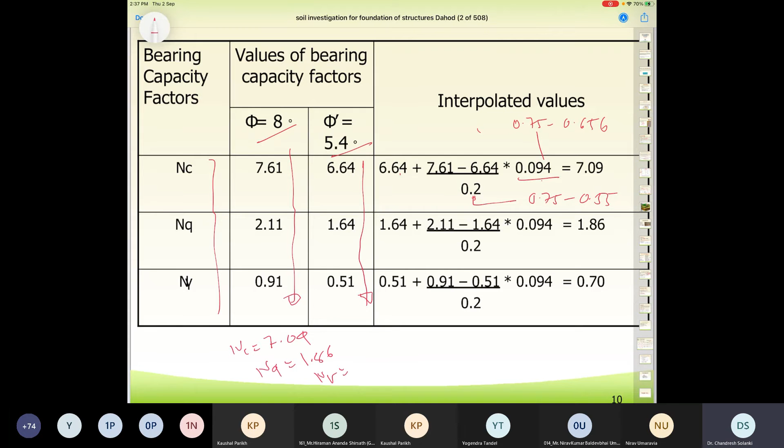This 0.094 has come from 0.75 minus 0.656 for the void ratio difference, and this 0.2 has come from 0.75 minus 0.55. So these values have been used for interpolation, and the interpolated values have been found as NC is equal to 7.09, NQ is equal to 1.86, and N gamma is equal to 0.70.

In case of general shear or local shear failure, we are taking E0 equal to 0.656. This is the case of intermediate positions. Keeping these values in the equations, the net ultimate bearing capacity is being obtained as

25.34 tons per meter square. With a factor of safety of 2.5, it becomes QS is equal to 10.14 tons per meter square. So here you are now well aware of the determination of the safe bearing capacity.

But as I mentioned, we are going to discuss the allowable bearing pressure and how it is to be determined, because this only takes care that shear failure does not occur if you take this value into consideration. But what to do for the consideration of settlement, and how it is being considered, is the important part of this presentation, which I am covering in the last few minutes.

Settlement computation criteria - you might have studied different methods in the topic of stress distribution of soil. A load placed on a soil mass causes stress changes within the soil below. The stress distribution sigma z due to a concentrated load Q on the soil surface can be computed using Boussinesq's equation: sigma z equals Q upon z square into 3 upon 2 pi. You are already familiar with this equation.

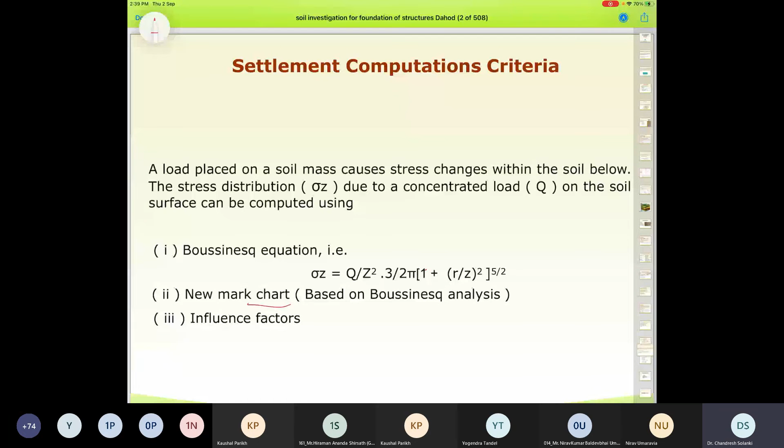Newmark's chart is another method for computation of stress distribution, and the influence factor is another method for computation of stress distribution. In our study, we are using the influence factor for computation of the stress distribution and settlement of the foundation. So the settlement computation table in terms of influence factor requires you to get the value of M and the value of N.

The value of M is nothing but 2Z by B, and the value of N is nothing but L by B. Z is the depth to the center of the thickness of the stratum from the ground. B is the width of the foundation, L is the length of the foundation. Likewise,

Now the stress distribution curve for our bore log has been drawn here. Depending on the overburden pressure, this line shows the existing overburden pressure line. This bore log has been divided into different layers, such as layer number 1, 2, 3, 4, 5, and 6. These are the 6 layers.

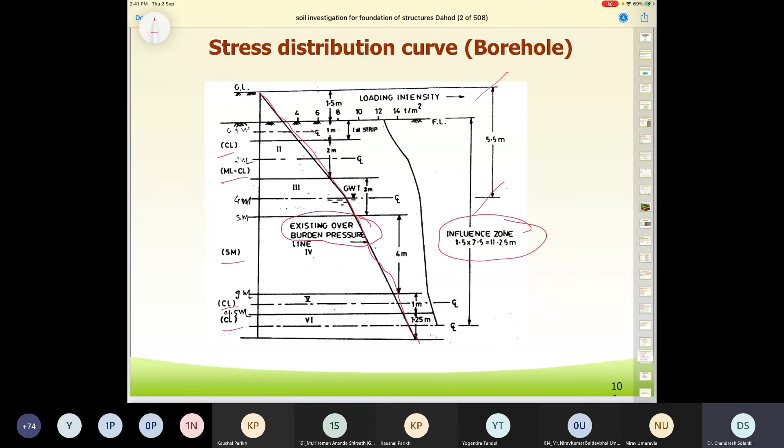So excess stress intensity computation, delta P, is to be done at the center of the clay stratum, looking to the Z values. For the first layer, your Z value is 0.5. For the second layer, you have a different Z value because you have to account for the thickness of the stratum. This is the width of the foundation, and hence this is the M value.

The influence factor is found to be 0.991 for the first case, and hence the incremental stress at the center of the first stratum has been computed, multiplied with the SBC, and it is found out as 10.05 ton per meter square.

So incremental stress is computed here in terms of delta P1, and it is found out as 10.05 ton per meter square. Similarly, we have 6 or 7 layers, and for each layer, by finding out such incremental stress, the values of the settlement are computed.

As you know, this incremental stress has to be used in determining the consolidation settlement: H Cc upon 1 plus e0, log 10 of sigma 0 plus delta sigma upon sigma 0. So this is nothing but whatever we have found here, that is delta P1.

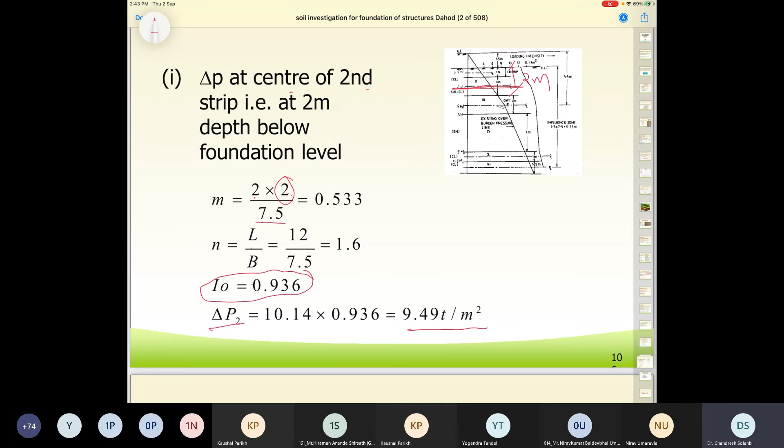I0 is found out as 0.936, and incremental stress has been found out as 9.49. As discussed earlier, we are going to include the incremental stress in computation of the settlement of the foundation.

You have S1 equal to 41 mm, S2 equal to 57.3 mm, and S3 equal to 36.1 mm. This equation has been used, and settlement is computed for the 3 layers, and the settlement of the 3 layers has been found out in this way.

But this fourth layer is a sand layer.

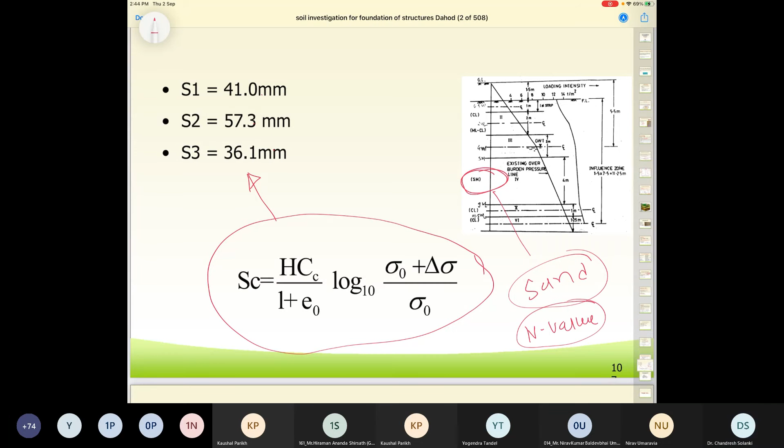So in case of the sand layer, we are required to compute the settlement of the foundation using the N value. Based on the N value, we are computing the settlement of this layer, and N corrected has been found out.

This value is 15, B is 7.5 meter. The water table affects the ground at this particular thickness, and these are the incremental stresses at the different layers as has been shown to you.

This is the correction for water table. How do you consider the correction of the water table, taking the D by B value and position of the water table W dash, which you need to take into consideration.

You will have to find out the water table correction factor as per IS 8009, considering these important graphs which have been given in IS 8009.

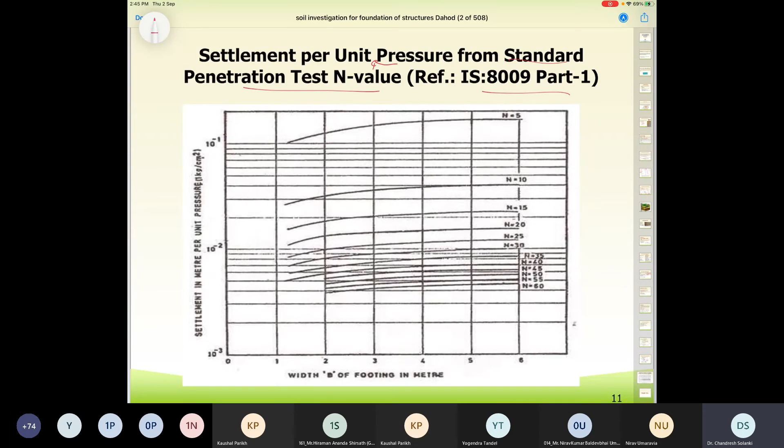Depending on the standard penetration test, how settlement per unit pressure can be expressed has been mentioned here, so you can find out the settlement.

You have to also include the depth factor and rigidity factor in your computation and the effect of the same. So we are required to include the effects of both the depth factor and the rigidity factor.

Depending on the dimensions D, B, L, etc., these factors are to be found out as per IS 8009 part 1.

So here you can find that the settlement of each layer has been computed. Total settlement of the foundation is found out as 160 mm. However, considering the rigidity factor and depth factor and multiplying with these values, this settlement is found to be 123 mm.

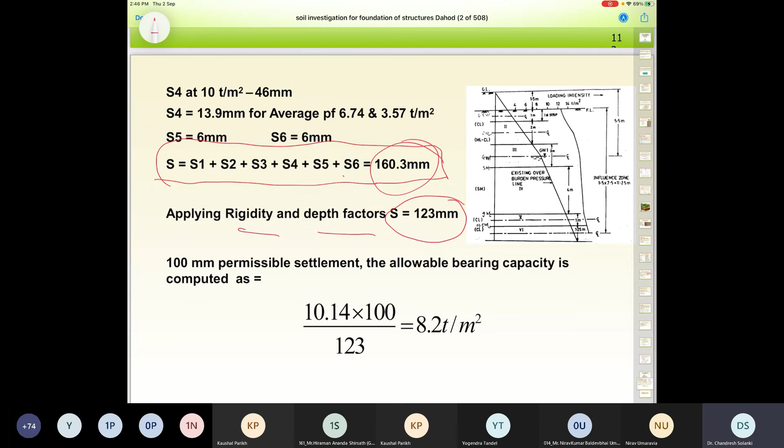Now, the important part of this presentation that I wanted to explain to you is how the allowable settlement has to be considered in the foundation design.

So allowable settlement in case of the raft foundation is 100 mm. Allowable settlement in foundation in clay is 100 mm. Here our actual settlement coming out is 123 mm.

If we keep the 123 mm, the bearing capacity is 10.14 ton per meter square. But if you have to restrict it to 100 mm, your bearing capacity can be reduced.

So for 100 mm of settlement in case of the raft, which is allowable for the foundation design, this value is reduced to 8.2 ton per meter square.

I wanted to convey to you how to consider the allowable bearing pressure and how to consider the effect of the total settlement of the foundations in the design of the foundations.

I have used these references for these presentations.